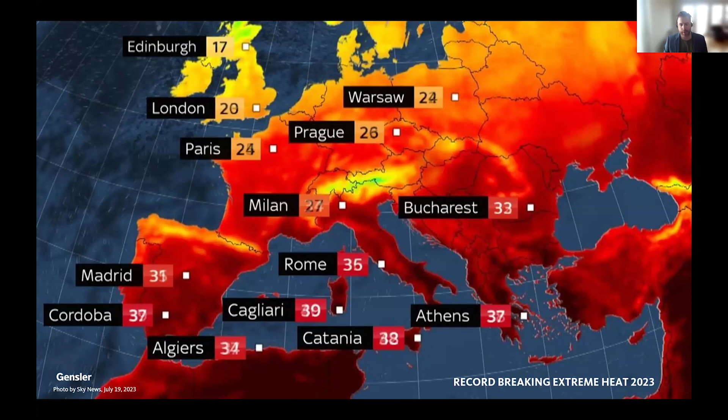Today we have the technology to live essentially anywhere on the planet, in some of the coldest temperatures with mechanical heating, and in some of the hottest temperatures with mechanical cooling. We understand that the Earth is getting hotter, and we're continuously seeing record-breaking temperatures annually on a global basis. We're also continuously seeing unprecedented fires across the globe, in the Arctic, the Amazon, throughout Europe, in Australia, and different parts of California as well. In addition, the way that we look at water also needs to change.

So this is a sphere of the Earth, but these other spheres represent different forms of water. This larger sphere is the amount of salt water that exists on the planet. This middle, smaller sphere is the amount of fresh water that exists on the planet. And that very small blue dot is the amount of drinkable water that exists on the planet.

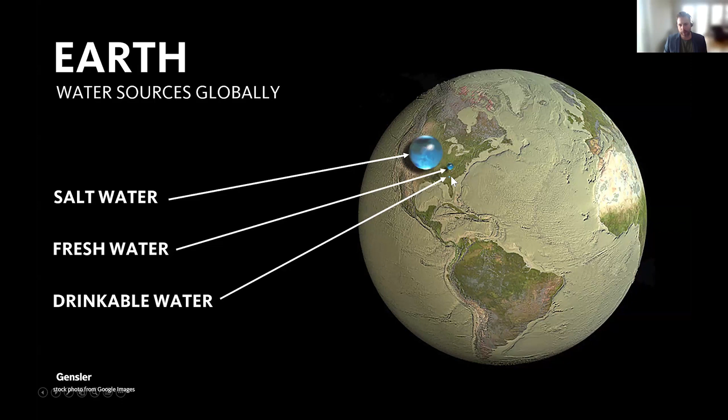Today we have 2 billion people with too much water, and another 2 billion people without enough. We have the resources to tackle a lot of these issues. And without water, there really is no sense of life. There's no form of life without water.

The Arctic is melting, and some scientists actually believe there's a distinct scientific possibility that we could have close to 6 meters of flooding. When exactly that will happen is still to be determined, but some countries are taking this into account, like the Netherlands, like Germany, and like Denmark, for example.

The U.S. has seen enormous storm surges across the last 25 years. Hurricane Andrew in the 1990s, about $27 billion worth of damage. Hurricane Katrina, about $150 billion worth of damage. Hurricane Sandy, $90 billion. Hurricane Harvey, $125 billion.

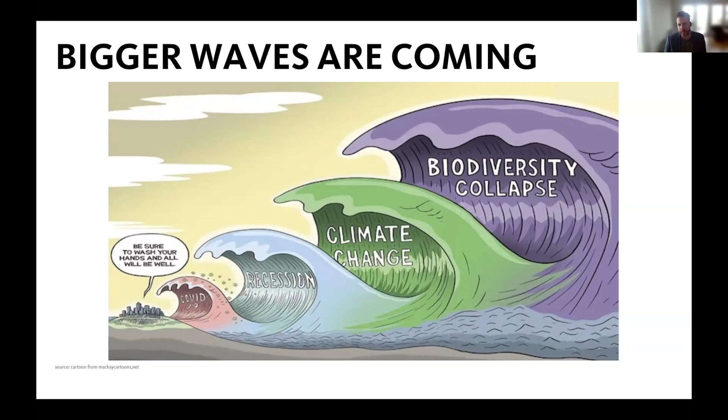I think this image really speaks volumes. We had this big COVID shock in 2019, 2020, 2021, which led to a recession, but we still have climate change. And there's a bigger thing happening, which is biodiversity collapse caused by climate change. The UN SDG wedding cake model really says it well: in order to have a strong economy, we need a strong society, and in order to have a strong society, we need a strong biosphere. Everything is interlinked.

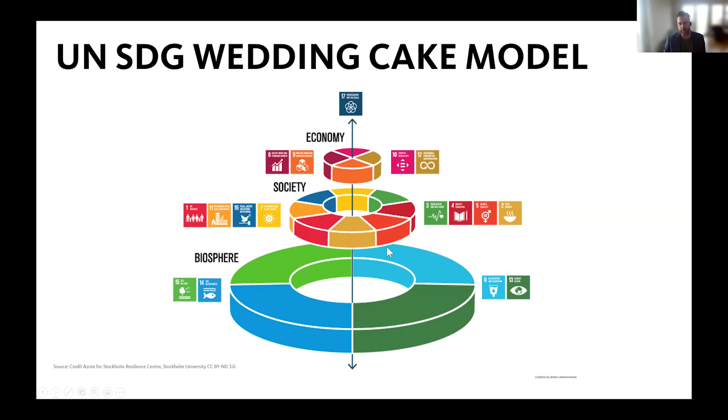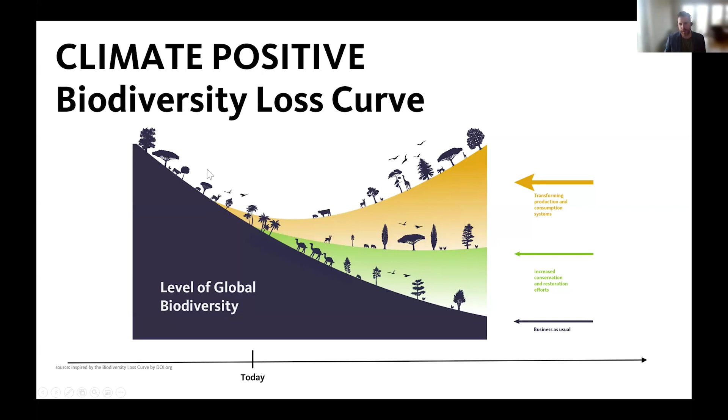This is such a big challenge. We're starting to see biodiversity net gain as a big part of the process in the UK, and I'll get into that in a little bit. So, decarbonizing the built environment — what does that mean, and how are we at Gensler accelerating the path to net zero? A little bit about Gensler: we're one of the largest innovative design companies in the world.

We have about 7,000 plus design professionals, over 46 offices across the globe. We're considered one of the big architecture giants, and we're one of the big green design firms with the breadth of work that we do.

We're a research-based practice, which means a lot of our research actually does inform our practice and our clients' decisions. A lot of times we actually get hired because of this research. It's a big part of what we do. About 18% of our profit goes into research.

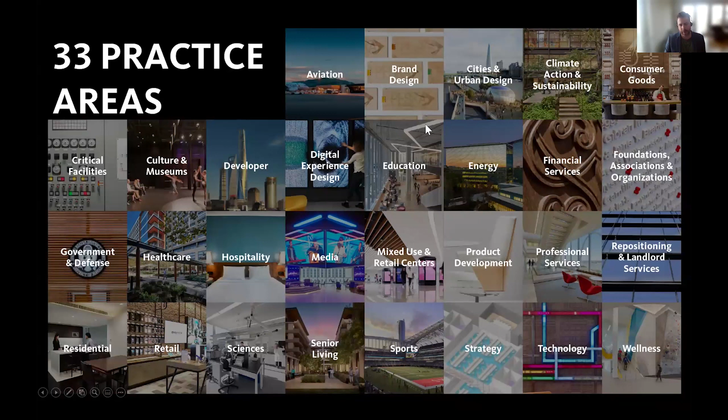We have over 33 practice areas. I'm technically a part of the climate action and sustainability practice area, but also the sciences and healthcare practice area. And we really kind of saw 2020 as an inflection point.

Since 2020, we've seen the demand of office space decrease, and there needs to be this new transition. We've also seen an increase of ESG related issues, but also a really big push for ESG reporting.

We've actually seen that this is a $17 trillion industry globally, and by 2030, it's predicted to be a $60 trillion industry. So there's a huge market with getting certain aspects of portfolios to understand the long-term risks associated with their properties, as well as how to lower the operational carbon and embodied carbon of their real estate assets in their portfolios.

We're seeing a major acceleration of this, almost like a 22% leap in just the last 20 years. We're seeing this particularly strong in Europe, and we think the Americas is not too far behind. We're seeing it across 64 countries and over 96,000 assets.

So in order to really understand how to become carbon neutral, we need to eliminate or offset the impact of operating and embodied carbon. And how do we do that?

We need to understand how we're actually manufacturing the materials, how we're bringing and transporting the materials to site. For operational carbon, it's really about understanding what those operational needs are, whether it's lighting, ventilation, heating, cooling, cooking, refrigeration, etc, but also the carbon offsets.

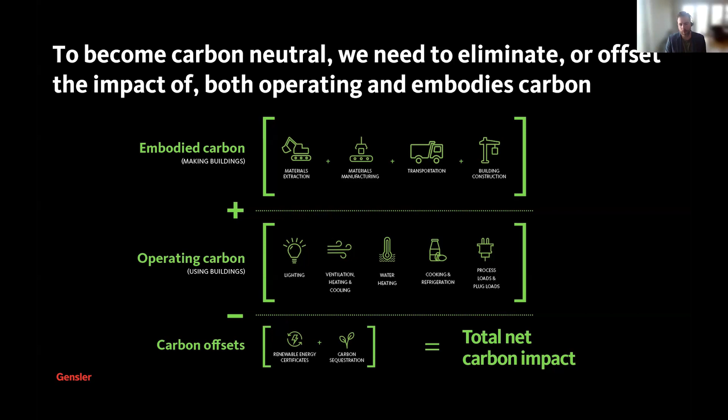What can we do to potentially influence and create an offset for carbon sequestration, such as investing in nature or investing into renewable energy? These are big components of our process at this time.

This is a huge magnitude of a challenge. We're going to need architects from across the globe to really help and be a part of this position. In addition, we need to bear in mind that the goal for 2030 is to be a net zero company. It's a very ambitious goal.

Will we get there? I think we might. I think we're definitely investing a lot into the company and how we're tracking our metrics, but this is a big part of it. So what do we do in terms of carbon reduction potential?

The first option is to build nothing. But most of our clients don't want that option. The second option is to build less. And a third option is to build a little bit smarter.

So understanding how you optimize the material usage of what you're doing, designing for disassembly, for example. And then the last one is building efficiently, so really understanding the low carbon construction technologies and eliminating waste.

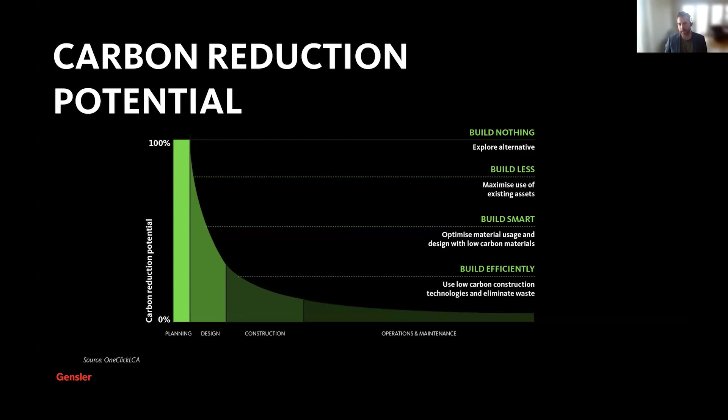These are the four principles in how we're pushing carbon reduction in our design process. We're also looking at building fewer new buildings and really having a bigger focus on adaptation and adaptive reuse as part of our portfolio. In addition, we're seeing over 150% increase in building certifications across the globe.

This means that there's a need for, especially developing new buildings or existing buildings within cities, that they meet a certain level of these certifications and accreditations in terms of how the buildings are designed.

Because of all this work, we've launched a climate action and sustainability practice area. We see that our clients are really asking for it, and we're hiring talented staff who understand the strategy and advisory services around sustainability, how we're looking at assessments and analytics, how we're looking at the rise in certification and verification of our buildings, but also how we're looking at post-occupancy and assessment analytics.

This is a really big part of our work, and we're seeing the scales basically from product design, fit out, building, portfolio to even cities. So this impact is really enormous, especially in the European continent.

Across the firm, we're taking on a lot of the toughest challenges. We're participating in some of the leading sustainability and climate action events, such as COP. We've participated in it for the last 5 or 6 years, and we've been making new commitments each year to push for this.

We've launched a GC3 initiative, which I'll get into in a minute. This is really about pushing climate action in cities. And finally, we're also finding creative ways to track the carbon in our portfolio. We've been able to record that we believe we've saved over 21 million metric tons of carbon in our portfolio globally, and that's our goal, but we've already saved 11 million annually.

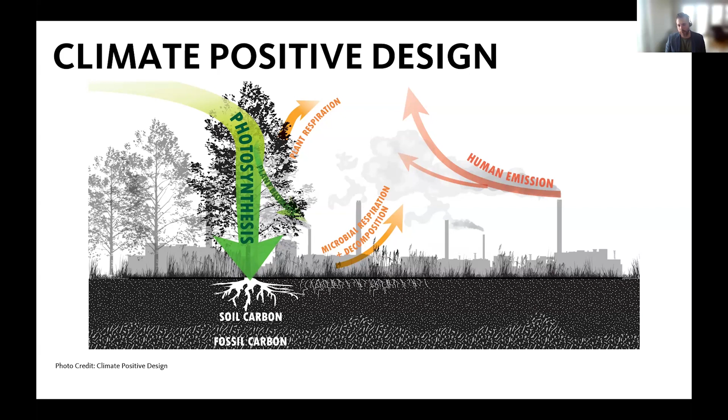It's really that simple, and we need more nature on our projects. We need more nature in our cities. Just recently, the City of London announced that 2% of all new build projects must have a biodiversity net gain, meaning 2% of the total area must have that. Over time it's anticipated to grow, and by maybe 2030 it might be at 15 or 20%. But this is an enormous start that is forcing developers to make a bigger impact on nature.

So from carbon tracking, we're seeing an enormous legislation pull, especially in Europe, that's forcing certain types of projects to actually provide LCA analysis. LCA analysis can be done by an engineer or an architect, but essentially it's an added service. If your company is really serious about ESG solutions, then LCAs must be a really big part of it. So our clients are looking for these metrics and evaluations on our projects.

We're tracking LCAs in multiple market sectors across Europe that are really influencing what we're doing in the United States, as well as in the APME regions and the LATAM regions.

We're finding that a lot of our clients are really pushing more for SFDR reporting, Sustainable Finance Disclosure Regulation reporting. Sometimes it's public, sometimes it's private, but it really pushes the folks that own their real estate assets to disclose what their carbon emissions are, both embodied and operational. This is a really big thing that we're excited about, that we think is really pushing it.

In addition, design for disassembly is becoming a bigger part of the conversation. From the beginning threshold of figuring out how the building's put together to how you take it apart over time. I'm currently working on a city for 9 million people where we're looking at design for disassembly as a big component of how we do it.

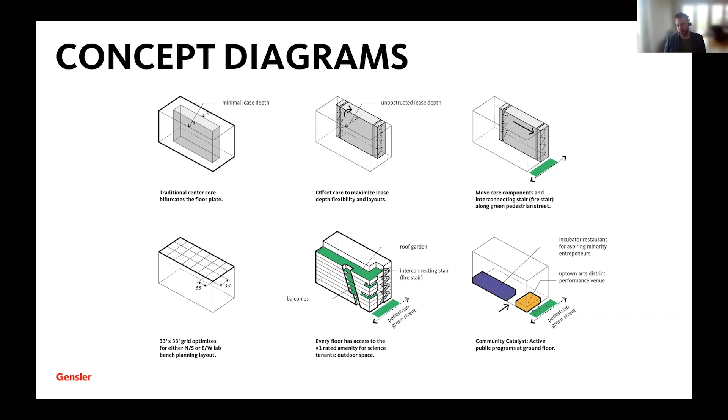In addition to that, we had a lot of indoor-outdoor spaces that also isn't very typical in a lab environment. And then we wanted to mobilize the ground plane by investing more in sort of community catalyst assets, but really embracing the pedestrian street presence as well.

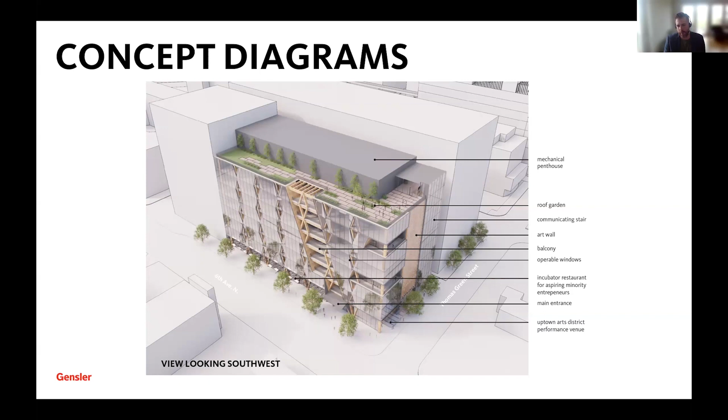So this is kind of a rendering of the building. Essentially, it has operable windows, it has those open terraces. And the thought was that this could be a pretty low embodied carbon design through the process of the structural integrity of the building, but also engage more with the community.

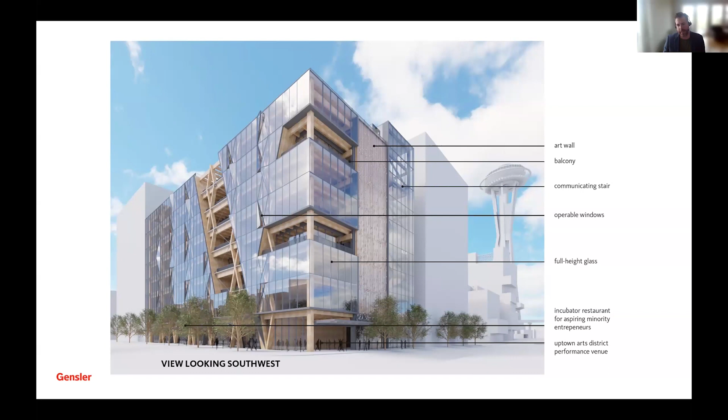So when we put this out there, the original intent was, can it be done? And the answer is that it can be. This original idea actually led to new built work. A lot of it is confidential and I'm not allowed to share it with you, but we actually have projects that are looking at this right now.

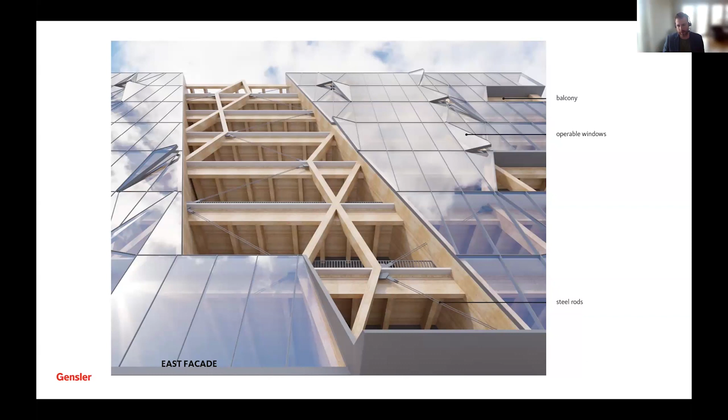And this research really informed the practice. So I guess for folks that own their own practices or are part of research-based institution practices, the research can really make an impact, especially if it's visual, especially if it's really backed up with some solid numbers.

So the key performance indicators of the project were really understanding optimization, reducing construction waste, understanding the efficiencies of construction, and looking at a 33 by 33 foot grid for a lab building. For environment, it was about EUI reduction, greenhouse gas emission reduction. For operational, it's about understanding natural ventilation, which as I mentioned before is really rare in a lab, plus embodied carbon reduction from the structural footprint of the building.

And then for health, it really embraces outdoor spaces, offering balconies and roof decks for building occupants, as well as having a communicating stair, which allows folks to use the stair more instead of the elevator. The social equity aspect was really about embracing the neighborhood by inviting folks in to be a part of the incubators, whether that could be a restaurant or other kind of inspiring or aspiring minority entrepreneurs, and also embracing the local arts district uptown.

So this project may or may not be built at some point in time, but it definitely stimulated a lot of new thinking. Based on our research, we think that this project would be about 80% less carbon than a typical conventional lab building.

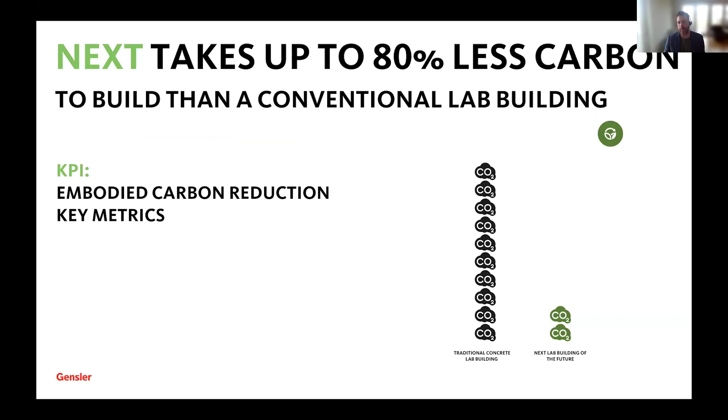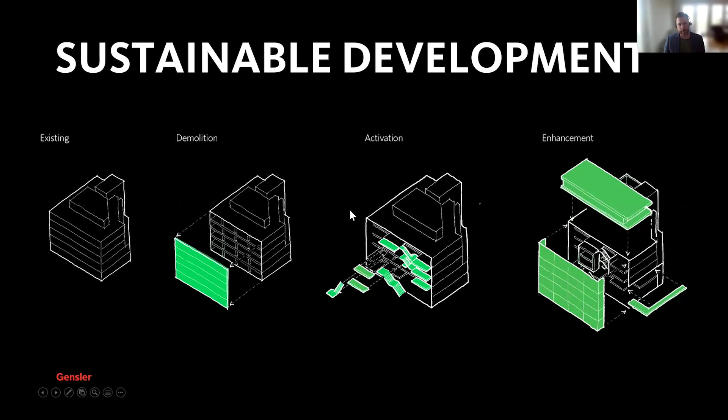Essentially, it was an existing building. We went through a demolition process. We activated it with new communicating stairs, and we enhanced it by putting a new type of facade as well as new floor area ratio on top of the building. Essentially, we activate it through the process of experience, creating kind of a creative platform for people and culture and collaboration amongst.

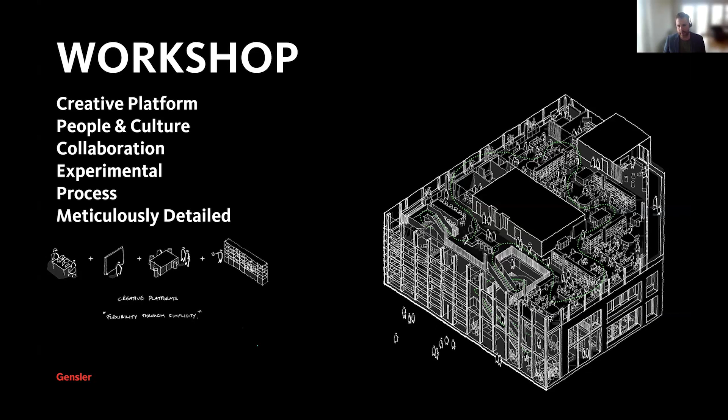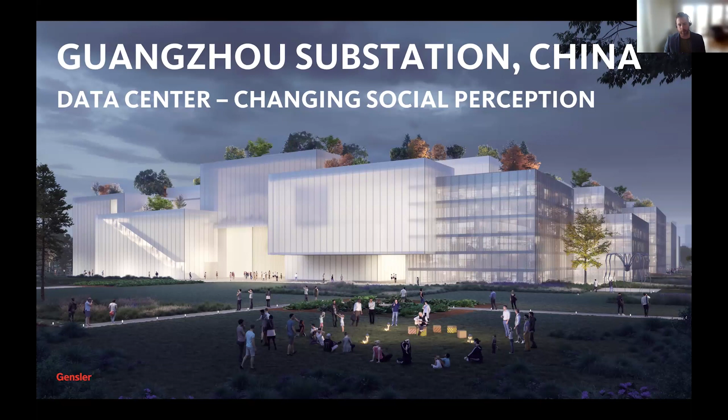Another project I'm going to share is the Guangzhou substation in China. It's a data center advancing AI technology. A big part of this is that if you look at a typical data center, it doesn't really have a human component to it. Most data centers across the globe are really these back-of-house spaces that are not very inviting. The thought behind this was, can we actually transform that and create the data center as an opportunity to really engage more with the public and transform our cities? Can we do that with other infrastructure, like a wastewater treatment plant or other types of treatment plants? One data center equals the electricity of approximately 50,000 homes, which is absolutely enormous. And the amount of carbon dioxide from one training of an AI model is equivalent to about 5 American cars.

So emerging technologies are really transforming our practice. And the more we look at these technologies, the more we need to understand the major incentives that come into play. A story that I like to tell is of the mansard roof in France. You didn't get taxed because it was a roof, but it still provided a usable area. That's how the French developed a lot of the architecture in downtown Paris, based on this mansard roof.

In addition, if we can find ways to increase the floor area ratio for developers, we will see a faster impact in terms of carbon reduction. So if we can use these kinds of tax reductions and generative ideas of supporting new floor area ratio for sustainable development, we'll see a faster impact. And we're seeing that in different parts of Europe for sure.

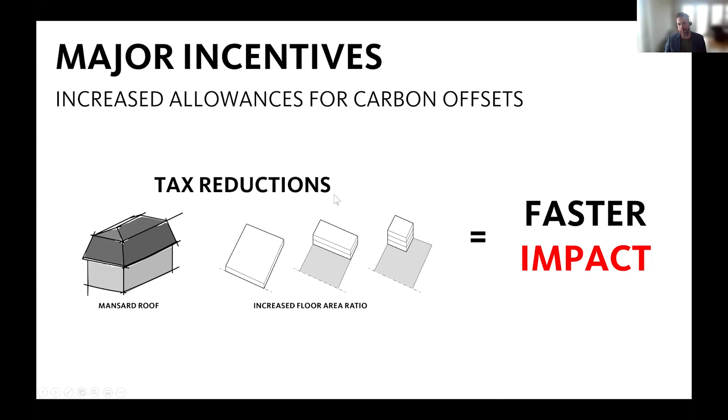If we can spend over $25 trillion in revitalization efforts from climate events, then we can find a way to pay for half of that to really build and retain our cities in a resilient manner. We could find a really unique way of encompassing and embodying refugees that have been displaced by climate or war-torn events. I think that we're really lacking a lot of those ideas.

I think the more that designers are on the platform demonstrating these ideas, using the technology to demonstrate these ideas, the bigger impact we'll see. And then the last quote is: the best way to predict the future is to create it. Thank you.